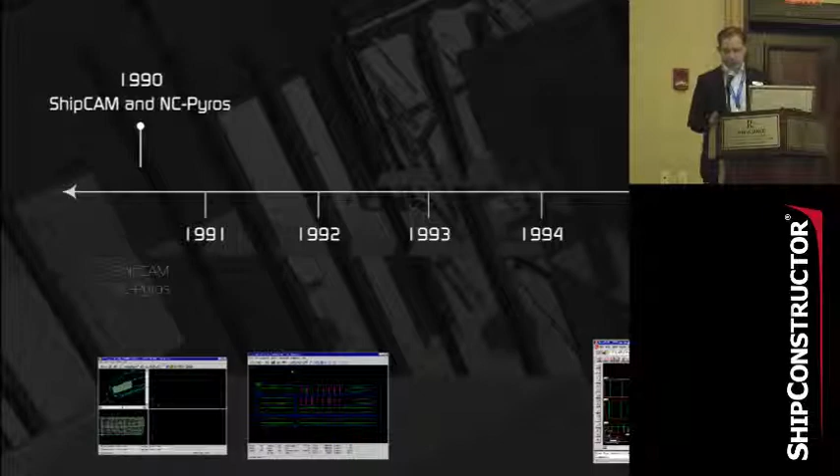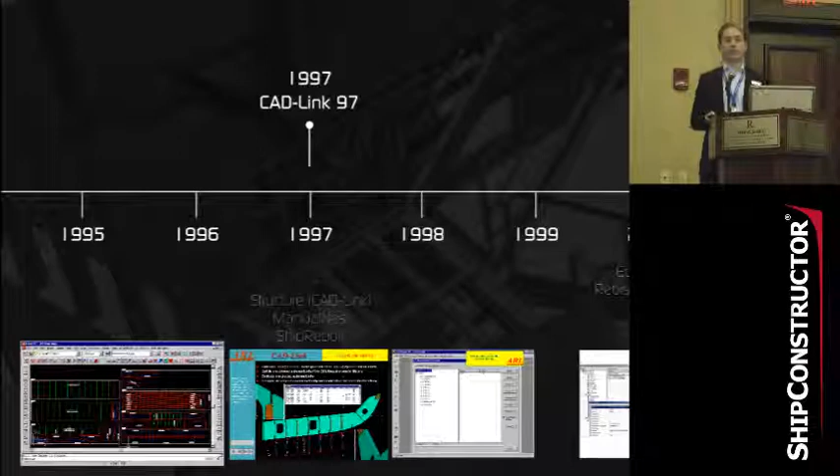Later, in 1995 to 1997, those were the CAD-Link days. The overall suite of products is called CAD-Link. ShipConstructor came along later, and the three products we were delivering at the time were Structure, ShipReport, and the nesting product. But it's key to note that at that time, Structure was really just a more intelligent way of automating and scripting AutoCAD commands. Most of the intelligence in the software was in the AutoCAD environment. Some of the customers that we actually developed that product with were using AutoCAD in that exact same workflow in a manual way, so it was automation of an existing routine and existing functions.

ShipReport was an Access database, very similar. It was built upon Microsoft's technology. And I think that was really the first transition, that we became really just a provider of plugins for other people's technology and other people's products. We didn't sell our own or create our own products.

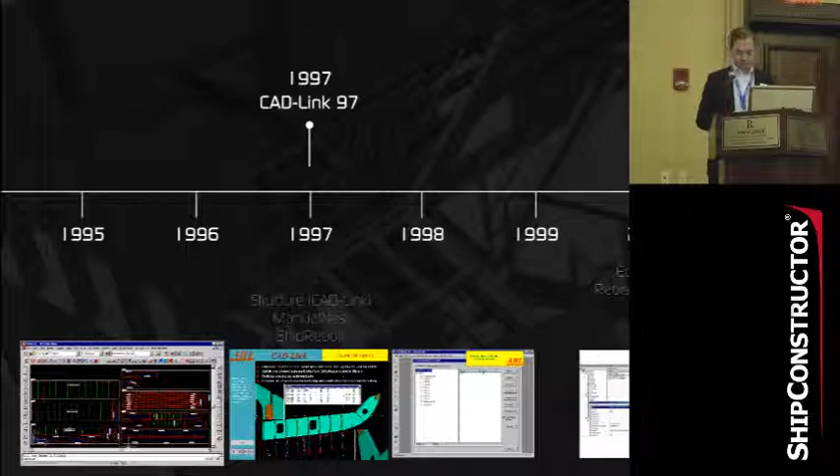In the beginning of the last decade, ShipConstructor 2001, which is the second product that I was involved with, was released. And most of us internally, as well as our clients, still think of that as the SQL Server version of ShipConstructor. We talk about that release as the first version on which all of our technology is based on Microsoft SQL Server, which would allow us to grow the capabilities, the scalability, and so on of the product. And to some extent that's true. But what wasn't as obvious, even to us internally at times, was that a transition was taking place.

And what I mean by that is products like our piping product, which we released at the time. It was the first product that we truly released where the primary intelligence of the product, the interaction with the product, the creation of information within the product, and the logic behind what was done was developed entirely by us. The other technologies we used, like SQL Server and like AutoCAD, they were engines that our software would drive to get something done when the user needed it to be done. And that, to me, was really the true turning point when ShipConstructor started to become the type of company that we are today.

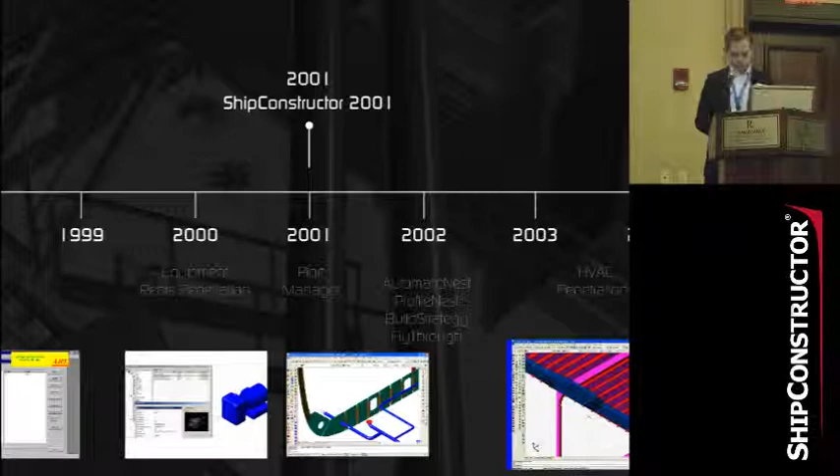In 2004 and 2005, we released ShipConstructor 2005. We also renamed the company at this point to ShipConstructor Software Inc. And every time I say ShipConstructor 2005, I smile a little bit internally because, to many in the company as well as many of our clients, that product is very iconic of that era of technology.

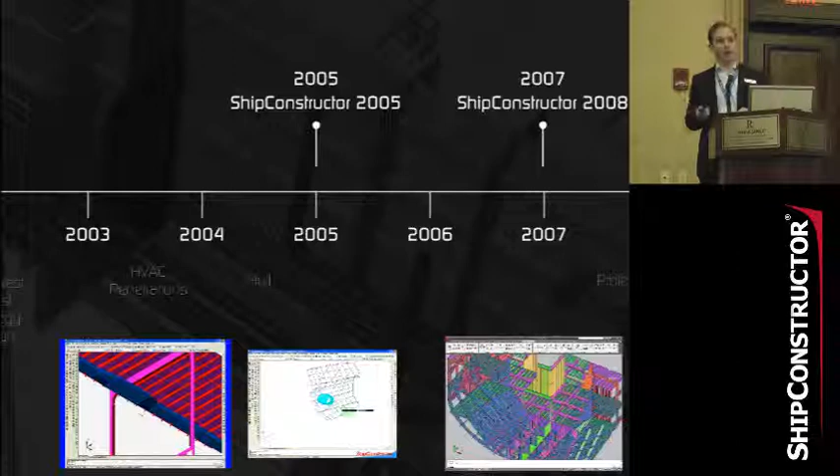It's looked upon very fondly by many of our users. But what we were quickly realizing, and our clients were realizing, was that version of the software and the technology behind it was one of the biggest things holding us back in terms of moving forward and going where you wanted to go and where we wanted to go. That was the old underlying technology that product was built upon, as well as, despite the addition of other intelligent products like hull, like HVAC, and so on, the structural product and some others were still very much of a scripting, automation, and sort of mentality.

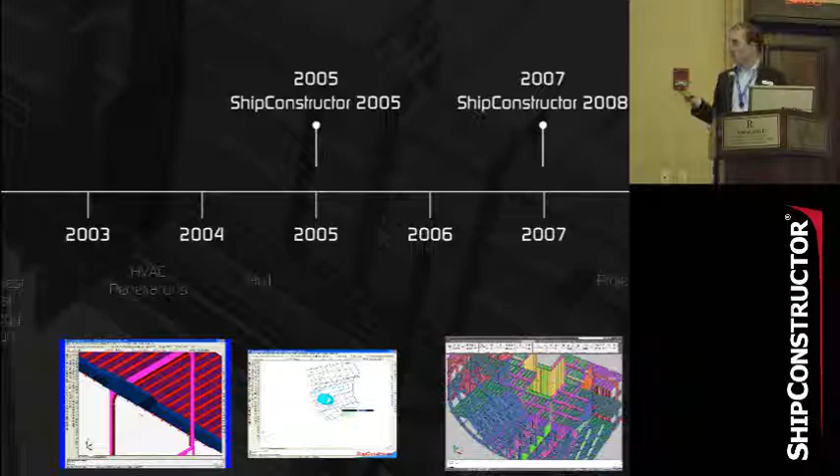To get into a bit more detail in terms of what we mean when we say that, we had many requests at the time for new capabilities as your business has changed. And we had many strategic initiatives internally that we wanted to move forward on. Many of those we just couldn't do in a cost-effective way for you or for us. Some of those things were distributed workflows, scalability to larger and more complex products, advanced modeling techniques like parametrics and associativity, and enterprise integration - ERP, PLM, PDM systems, and so on.

So we knew something new was needed. And I think many of our clients knew that something new was needed at the time as well.

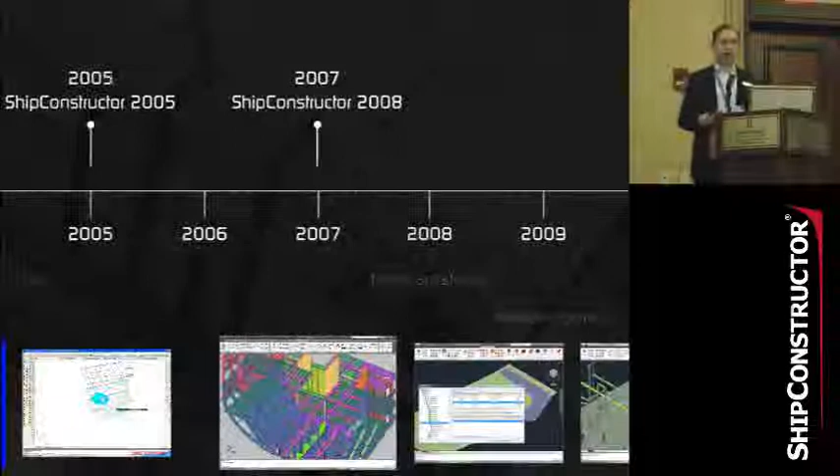And what was that? That was ShipConstructor 2008. Many of you, I think most of us, know that ShipConstructor 2008 was the technology platform on which all of the products that we deliver today is based. In that product and in all the products that sat on that technology, the relationships and intelligence, both in the database and in the 3D model, far exceed what is available in AutoCAD or in SQL Server by themselves.

And those capabilities that we were able to add based on that technology - things like DD-ROM, project split and merge, standard assemblies, weld, pipe supports, and so on - as well as a lot of improvements to the existing products. Pat David has a presentation on that this morning, which really shows a lot of the things we've done since we created this platform of technology.

But in terms of transitions, this was, for us, the key moment at which we became solely a vendor of enterprise-level products. That plug-in mentality, that automation mentality was gone. All of the products we delivered had their own intelligence and were focused on solving specific challenges.

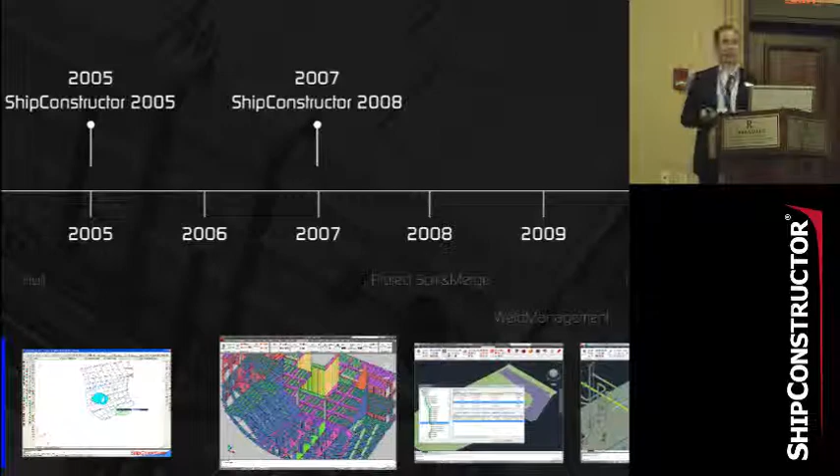And looking forward to the end of this timeline, you can see, I think, the results of that platform of technology and that transition in the company. We're delivering more capability and more products, more improvements to our existing products today or in the short term than at any time since 2000 to 2005, which was the heyday of ShipConstructor development.

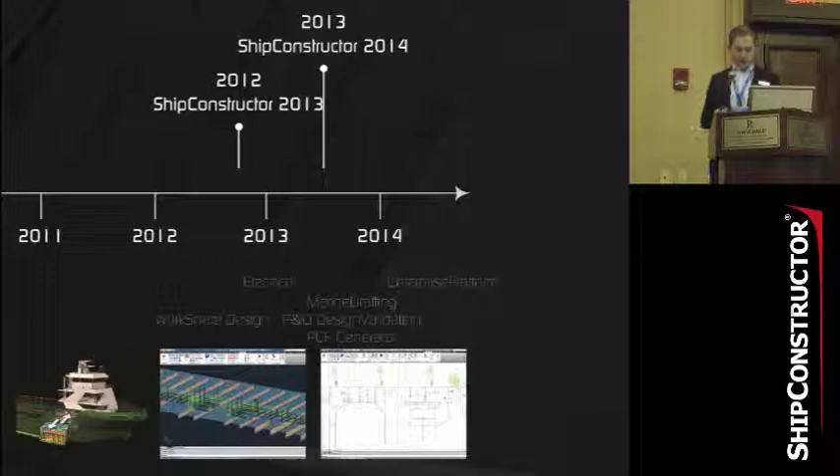But, and I'm going to get to the point about empowered engineering now, some of these products and capabilities are different than the ones we've created in the past. We're delivering more than products, as Michael mentioned. And all of that falls under the umbrella of what we call empowered engineering.

We have two parallel meanings - we think of two different things when we throw empowered engineering up there, or we have a conversation about empowered engineering. The first is the little e engineering, the task of engineering, the activity of engineering. That's focused on increasing the capacity, capability, and effectiveness of an individual user involved in engineering tasks. And that's something that we're going to continue to do - it's something we do through improving our products and some of the other things we're doing.

But the more significant change, or the more significant element of empowered engineering, is the big E Engineering, as Michael was saying. That's focused on the department of engineering, what it represents in the organizations that all of you represent. These days, Engineering with the uppercase E is asked to do far more within the organizations that you represent. You're creating far more information, far more complex information, through far more complex workflows than ever before. And we've had a lot of discussions with a lot of the people in the room, our clients overseas, and so on. We've asked them and we've asked ourselves, what can we do to help you overcome some of those challenges?